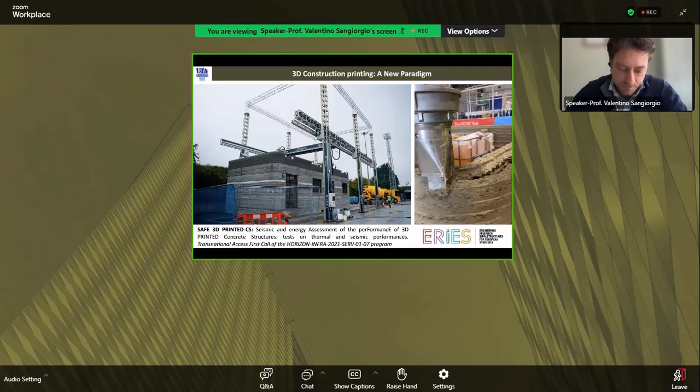To the left, you can see a short video of the technology. So this is the COBOD machine. This is interesting because you can print also concrete with aggregates of 2 centimeters of diameter. So this is quite a large aggregate if compared with other technologies.

In addition, we investigated the construction techniques that are being used in the real sector. For example, here you can see a prototype of a construction built with this technology from HTL Tech, a partner of our project. Typically, these constructions are built with 2 walls that constitute the envelope, and inside the wall, the companies are including also insulation material. There are also some important structural details that I will show in the next slide.

From this, one important thing is this change of color. So please remember this kind of situation because it's very important for the structural performance. This happens when you stop printing one day and you start printing the day after. So this is a cold joint that is difficult to avoid because otherwise you should have workers that work full time.

In addition, this kind of joint can happen also for a momentary issue of the 3D printer. Sometimes it happens. And so we cannot forecast the position of this cold joint all the time, because if the machine has a small problem or if the concrete has a problem in the pumping system, we need to stop the printer and this creates a cold joint.

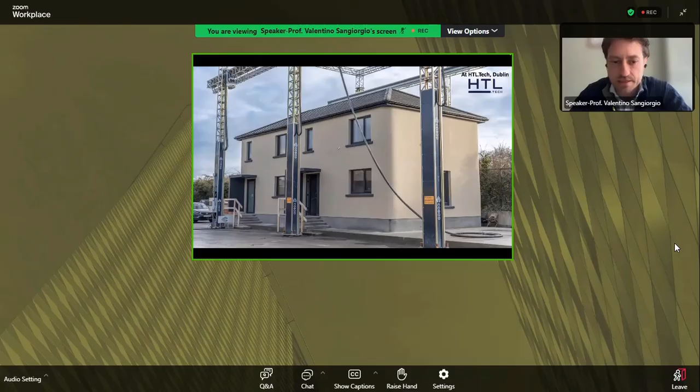Okay, so this is the view of the building after the finishes. And this is a construction typology that is already being used in the north of Dublin, because HTL Tech is a company that works in this area. So this construction technology is changing the paradigm of construction, because this new typology is not similar to steel, is not masonry construction, and is not similar to the classical reinforced concrete frame structure.

This is something new. Indeed, we have orthotropic material that is related to the process of creating walls layer by layer. We have new construction details. For example, here you can see a lintel that is used to create openings. We also have different reinforcement. You can see here that we put this kind of light reinforcement to avoid the collapse of the wall during printing.

And this can be also helpful to make the two walls collaborative in the entire envelope.

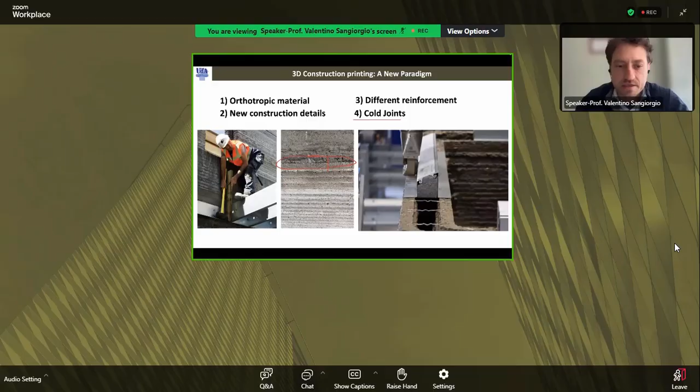And finally, we have the cold joint. So you can see here what happened when you stop the printer and you start again after a few hours or the day after. Typically in the construction practice, companies use some bonding primer to increase the connection of this cold joint, but I can say that it is not sufficient to have the same characteristics as the rest of the construction.

So we decided to investigate this problem in a 4-step procedure. First of all, preliminary tests to analyze the orthotropic nature of the material. We used the preliminary tests to calibrate a numerical model, and after we designed the final test by considering the foundation level, the connection with the shaking table, and also the dimension of the specimen. And finally, we had the final full shake table test.

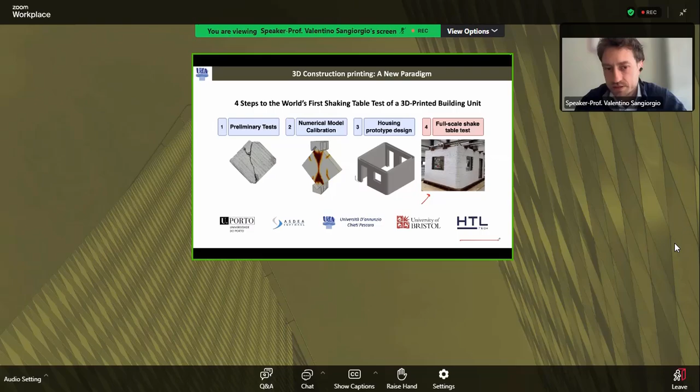This project is made in collaboration with the University of Porto, ASDEA Software, my university, University d'Annunzio of Chieti Pescara, University of Bristol that hosted the final shaking table test, and HTL Tech, that is the company that provided us the COBOD technology. So first of all, first step is the characterization of the material.

So the next step was the calibration of the numerical model. We developed two different typologies of numerical modeling. One by considering a layered model, so we model every single layer with the interface, and another version of the numerical simulation with a homogenized material. So in this case, the orthotropic nature is included in the information that we use to build the numerical model. The numerical model is made with STKO, that is a software that is developed by ASDEA.

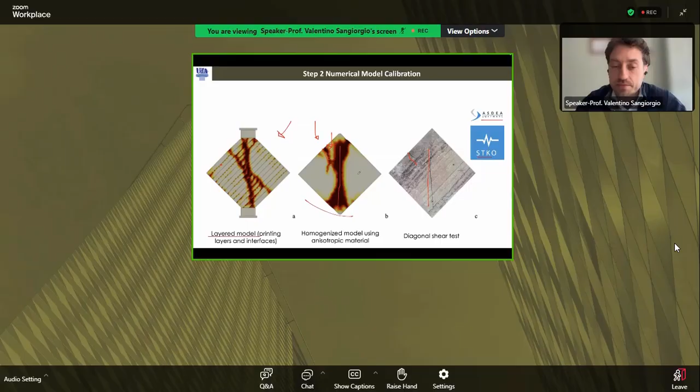The result was very similar, and so we decided to use the homogenized model because this is quick to be achieved, and also the computational cost is lower than the layered model. The result is almost the same. And you can see here that the cracks that occur in the diagonal shear test can be simulated very well in the numerical simulation.

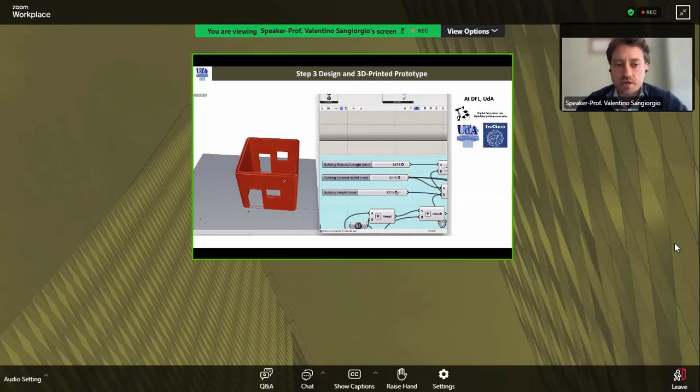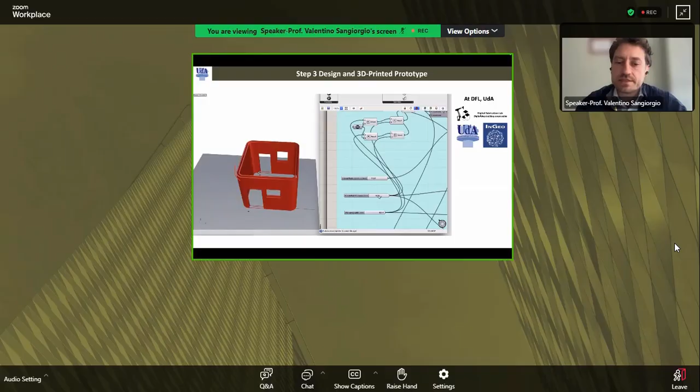The third step was the design of the printed unit to be tested on the shake table. So we developed a parametric model, and you can see that with this parametric model we can change a lot of geometrical configurations of our construction. In particular, also the position, the dimension of the opening, the radius of the corner, all the parameters that can be important for the structural performance.

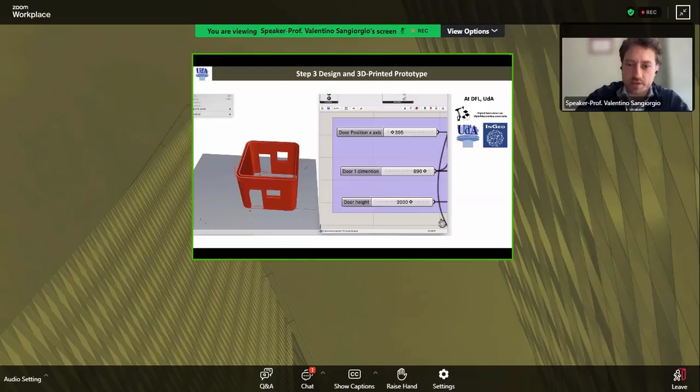This was very important to achieve the final configuration of the test, because with this script we were able to generate, in a very fast way, a 3D model to be analyzed in the FEM software. So after an iterative process of exporting the geometry, adjusting parameters, and simulation, we reached this final configuration.

Since our goal was to investigate the seismic performance of the structure and not the connection with the soil, we decided to connect perfectly the construction with a steel ring beam that has been directly connected with the shake table. In this way, we started printing directly in the laboratory. So here we are in the SoFSI Lab, the structural laboratory of Bristol.

And you can see that we used exactly the same construction techniques that are used in the real world. You can see also here other reinforcement that can be used typically in the construction site to reinforce the opening.

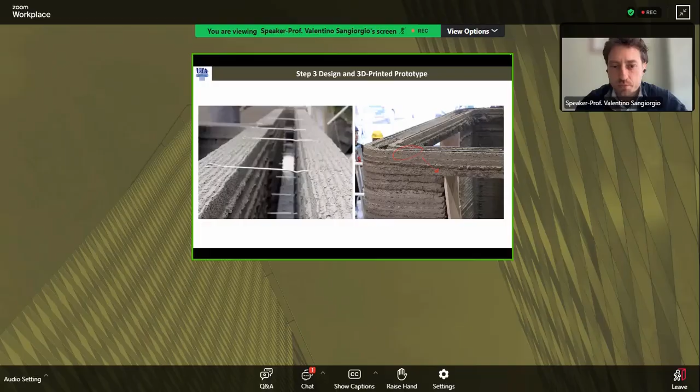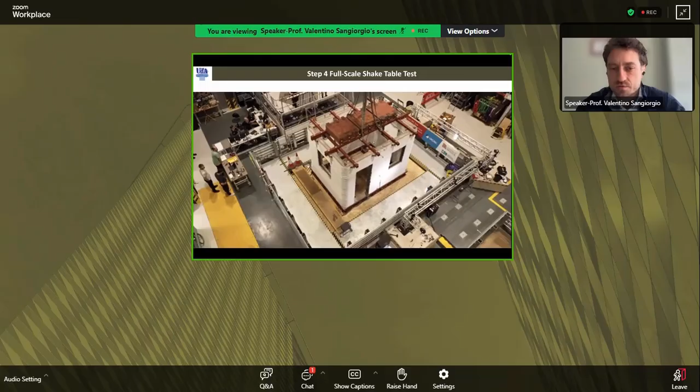So after this, we used a lot of sensors, cameras, accelerometers, but also sensors to identify the deformation of a lot of different components of the construction. So you can see here a lot of sensors located around the structure, and we started the test.

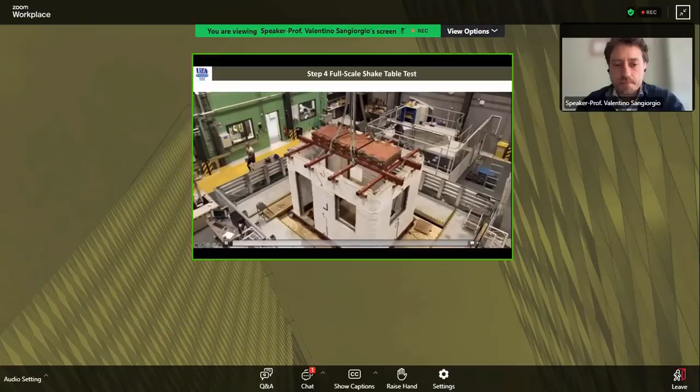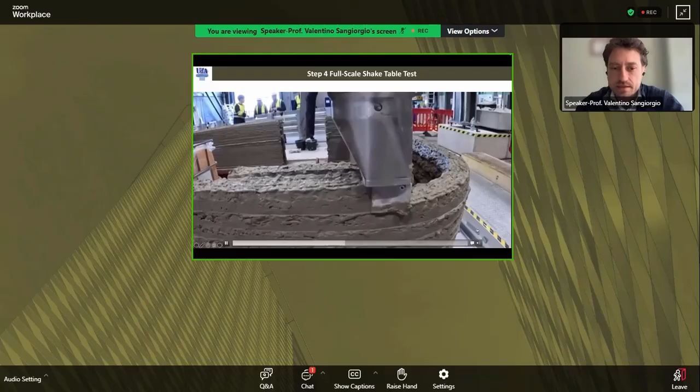If we wait a few seconds and we go to the end of the video, you can see exactly the moment where a huge failure occurred. In particular, we can jump to the end. If you look here, you can see that all the upper part has been detached from the rest of the structure.

Here you can see a huge crack, and another crack occurred in this position. So here you can see what happened during the test. This is the upper crack, and here you can see a lower crack, one horizontal and some diagonal cracks that reached the opening. Why is this interesting?

Because the cracks occurred exactly in the position of the cold joint. So we can state that after this test, we demonstrated for the first time the importance of the cold joint compared with the opening.

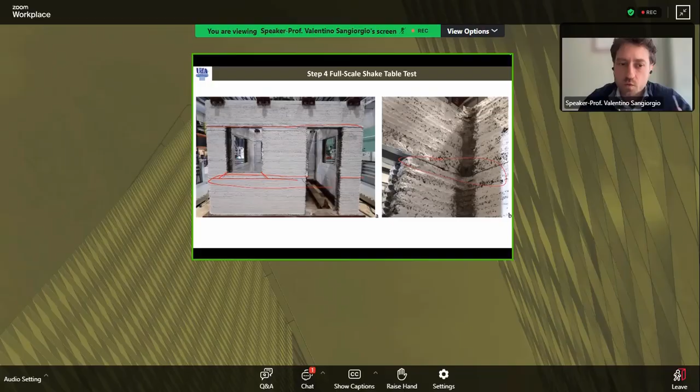In future research, we will complete the analysis of all the numerical results of the tests that were concluded a few months ago, and so we will be able to disseminate in the scientific community all the numerical results of the modeling, the calibration of the model, and all the numerical results of this kind of test. Okay.

I also want to introduce another project that is not properly 3D printing, but is strictly related to robotics and this kind of tool in the construction sector. This project is named Masonry Surgeon Bot, a FISA project funded by the Italian Ministry of Research in collaboration with a local company. This is interesting because we are building a robot that is able to operate like a surgeon on the masonry to reinforce existing construction.

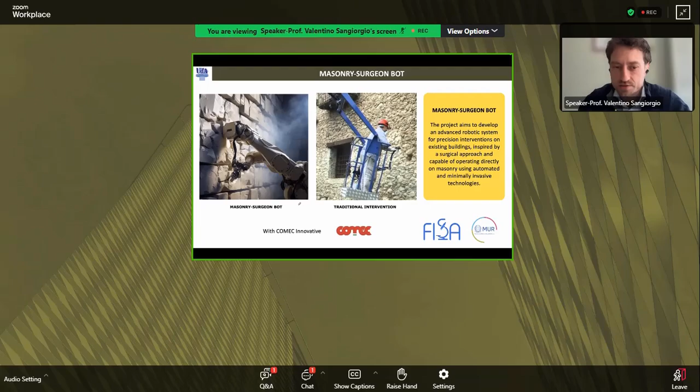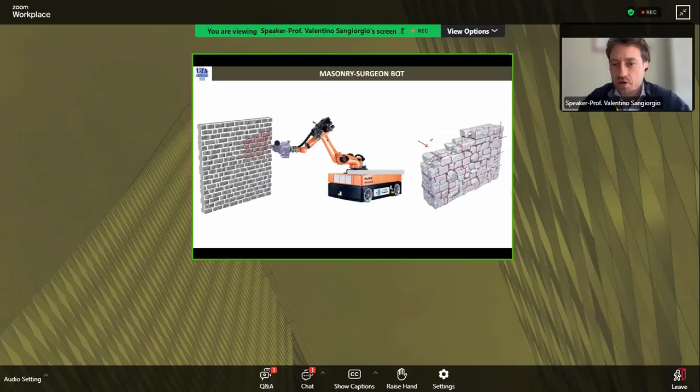So we will develop a fiber reinforcement system that will be extruded or included directly inside the mortar joint to reproduce a modern version of the reticolatus intervention. So here you can see the robot of the company and the complexity of the end effector that places the fibers. And in our project, we are starting to develop all the automation systems for the robot.

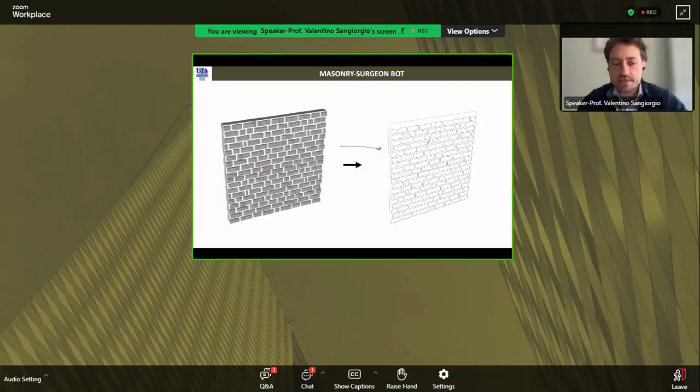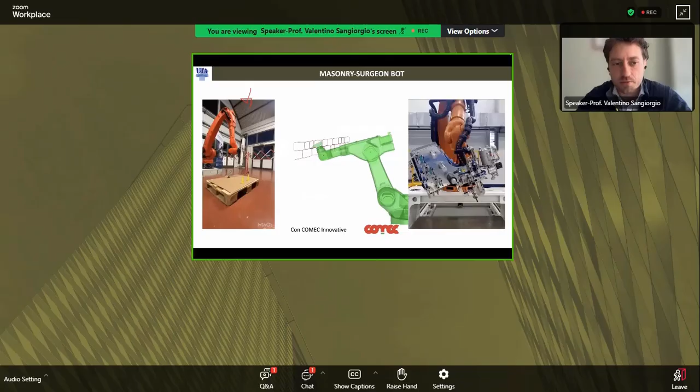So the robot will be able to 3D scan the masonry, identify the mortar joint, and operate directly inside the mortar joint. This is just a simulation, but you can see in our laboratory that we are starting to work with the robot to try to make the robot safe during the operation. So you can see some obstacles here, and you can see the robot avoiding the obstacles during the toolpath.

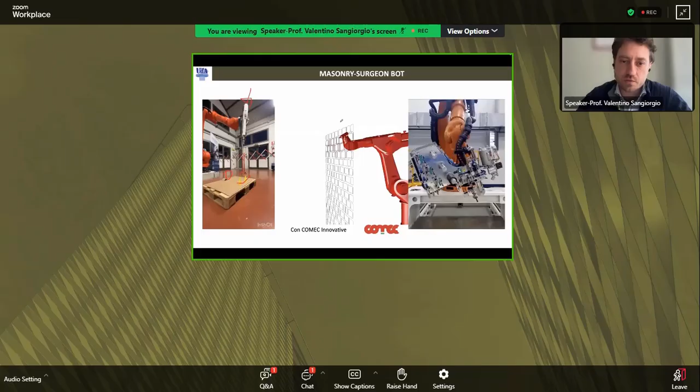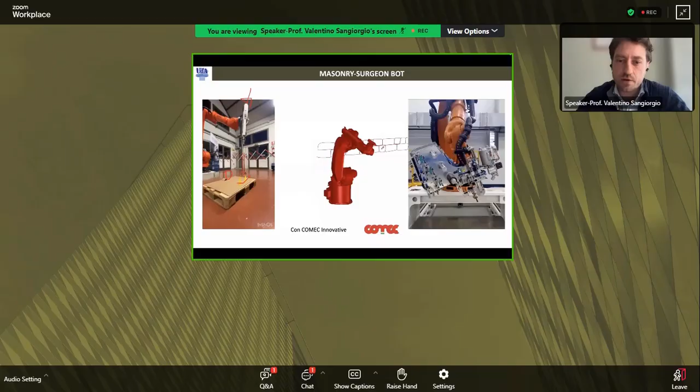And here you can see the toolpath that is fully generated with artificial intelligence in combination with a Python script and Grasshopper. So the combination of these three tools allowed us to automatically achieve the toolpath of the extrusion. And here you can see the complexity of the extruder that is being adapted for this kind of application, because the company typically works in the automotive sector or in the aerospace sector.

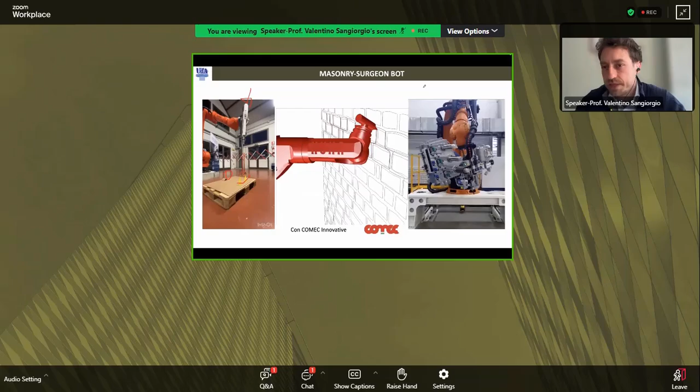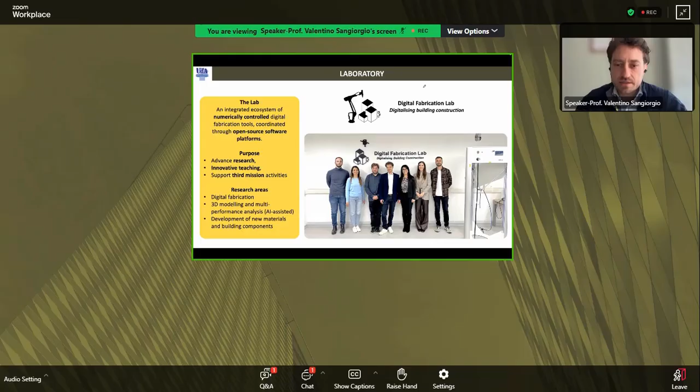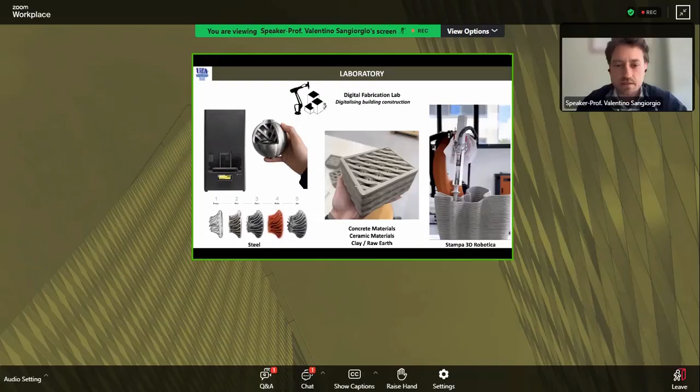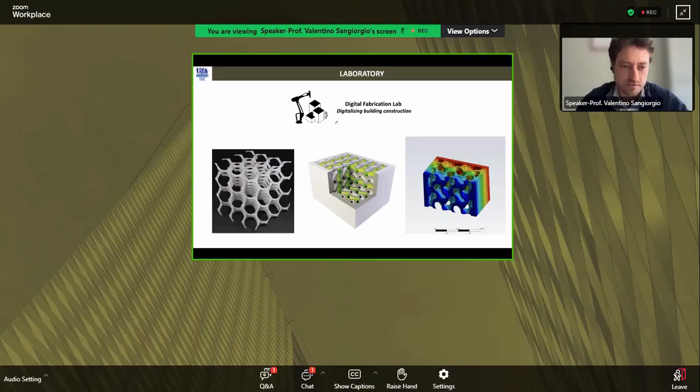Okay, I jump to the conclusion. I wish to thank all the guys of my laboratory, the Digital Fabrication Lab. Without them, it would be impossible to achieve these projects. In our laboratory, we have different machines to print steel, concrete, but also clay, raw earth, or ceramic material. And you can see here how we can reach complex geometry by the combination of artificial intelligence and parametric modeling.

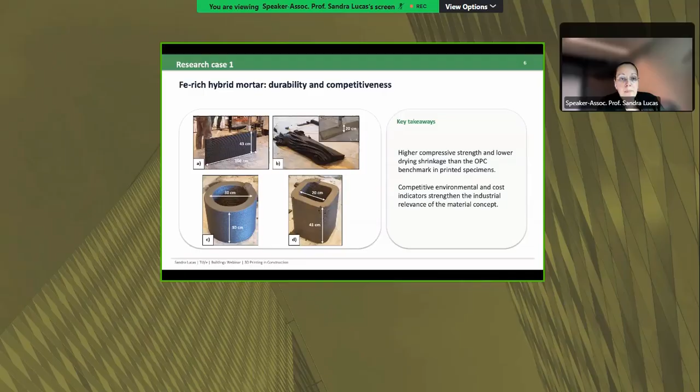As I said, we developed an alkali-activated material for our 3D printer. You can see here the process, but I won't go into much detail. We were able to print at a relatively large, medium scale, and had good results with this material, but then we faced the obstacles of reproducibility.

We also did a lot of work, and now have a PhD student finishing her work on waste-derived lightweight aggregates - we used cork for this specific purpose to develop a lightweight material. Again, we were able to print at medium scale. In the final steps of the project, we printed a wall with this cork material, and reached very interesting results in terms of thermal performance and mechanical performance.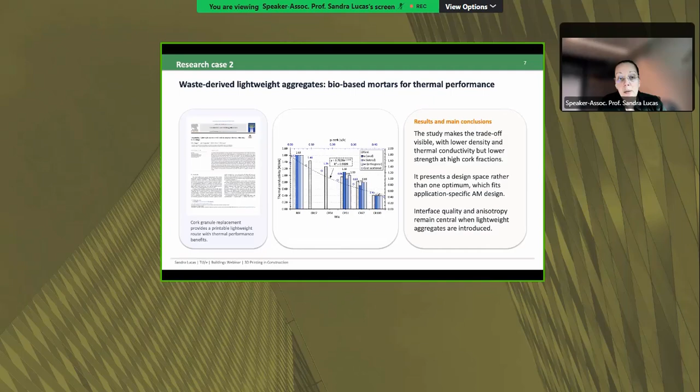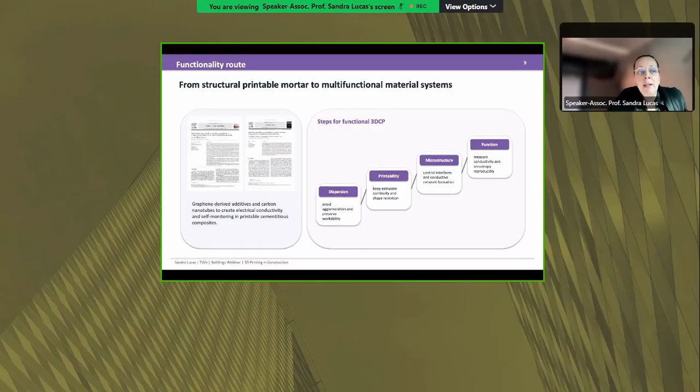We moved then from looking into structural printable mortars or lightweight mortars and sustainability to the side of creating materials with functionalities. This is another side of our work here, where we try to create a self-sensing material. The goal was to print a material that not only can fulfill the structural requirements, but that can also detect damage, or that we can develop a way to sense that damage and act if we detect it.

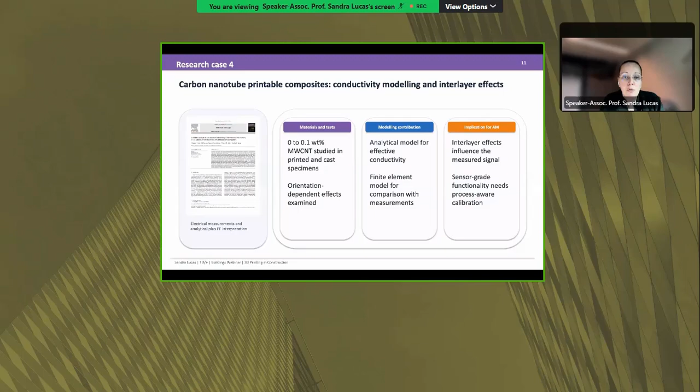So we printed specimens again, but this time in a much smaller scale. We explored the use of graphene nanoplatelets, but then we moved to carbon nanotubes. For this work, we managed to develop and study the conductivity at a small scale. But we also faced, again, some problems, especially when moving to the large scale.

So in this design, among the different design strategies that we selected, there are still some variables that we can't fully monitor. For example, when you go for alkali activated materials, there's still the open time that needs to be controlled, the pump pressure, and aspects with the activator sensitivity, which is still a main risk.

For the fillers and aggregates, you still have the segregation aspects to control, the anisotropy, the packing changes, because you have a material that isn't always packed in the same way. So you have changes in porosity and extrusion stability. And with the multifunctional or functional materials, which we call 4D printing, you still have a lot of problems with mixing control, poor dispersion of these materials, and the cost.

So then we moved to what I call 5D printing, trying to embed the functionality but also the control - so the function plus the control in the system. And we took the step to improve how we control our printing process.

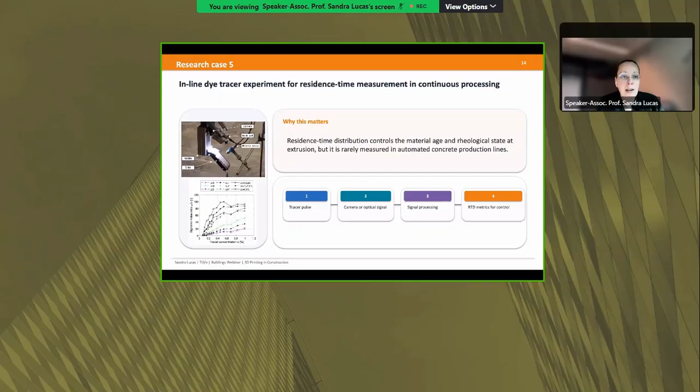So we started by developing these inline controls, and from that work, we took some steps further to study and control other parts of the system. We are trying to create a system where we can, for example, read the pressure and act on the material if we need to change the amount of superplasticizer, or the amount of aggregates, or the amount of water.

And from that process control, we realized that we're collecting a lot of data from these materials. So we moved to explore how we can use machine learning models and AI to control the materials. We have some results already from early work done by students in my group. But we realized that, for example, in order to predict printability - one of the aspects we started exploring - we could use these models and AI to predict the printability of our material. So the moment we go to the printing system with a certain composition, we should already be able to know that the composition is printable or not.

This connects with the fact that we're trying to use alternative binders for more sustainable mixes, but at the same time, if we reduce the amount of cement, we have problems controlling these materials, and we need to predict if that composition with those specific materials will be printable. In a preliminary study, we realized that indeed the composition of the materials has a huge impact on how the system and the models will predict printability - whether they will say the mix is printable or not.

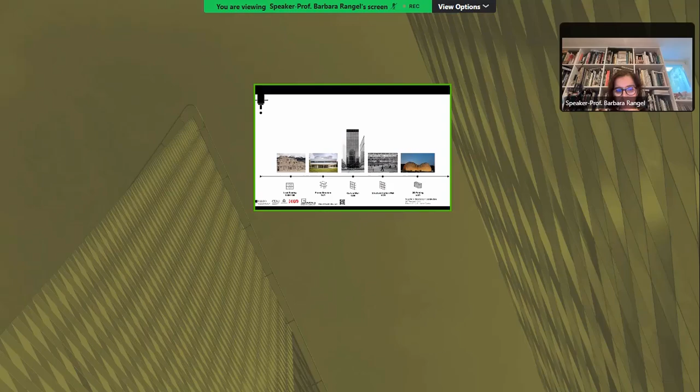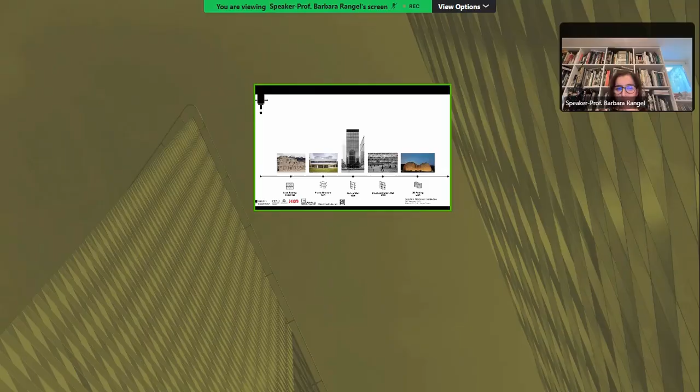If we take a fast look at the history of construction, architecture, and civil engineering, we can understand that the way we build is directly related to the form of architecture. So the question we ask now is: how does 3D printing transform or is transforming the way we make architecture? If we look at Corbusier's experiences in La Unité d'Habitation de Marseille, when concrete was beginning to be used, complex forms started to be done. Or even in Frank Lloyd Wright's experience in Fallingwater, the possibility of having spans was used in a very intelligent and robust way to define the architecture of the house.

And of course, Sagrada Familia is an experience of disruptive construction and architecture. I can imagine if Gaudi was born in our era and had a 3D printer, he would have gone even further with his formal experiences. And Miguel Fisac, an architect and engineer from Spain, in his work was always making this relation, this biomimicry relation between the human body and engineering.

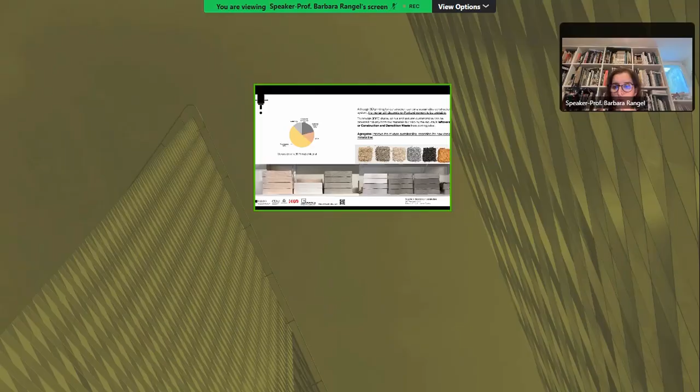In his research during the last years, he made a library of materials that can be added to the mixture to reduce not only the cement, but also to replace part of the natural aggregates, giving the possibility of new tectonic forms, not only in texture but also in color, using waste materials like brick from demolitions, glass, and some stone powders like granite or marble. This is related to the parametric library he developed, so that anyone who uses his research can make a direct connection to the development of the piece, with the characteristics not only of the material but also of the equipment.

Elis Ribeiro, also working with us in her PhD at DG at FEUP, used marble powder to develop some Cobogó structures. This is a structure that is used in Latin American countries to provide natural ventilation of the spaces. And now she's also developing a wider structure like this, but using fibers in the mixture.

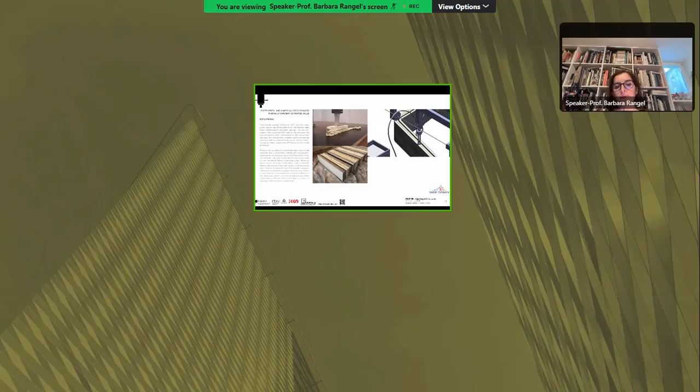We also were able to produce some research on using soil as the main component of the mixture in the work of Ana Luisa Guimarães, a Master's student in Design that we also have in the Faculty of Engineering. The work of Sofia Pessoa, directed by Ana Sofia and Sandra Lucas: she has been working, and continues now after her PhD is finished, on the study of the thermal behavior of the 3D printing system. She is making the connection between the thermal behavior of the wall and its parametric geometry.

And Jaime Cunha made an LCA study of a house printed by a company that we have been working with that is here in Porto. And also Manel Jesus, who will present later, is studying the use of 3D printing in the refurbishment of monumental buildings. And also here, a work made by ILS, directed by Jorge Lino, that is working on 3D printing in reefs.

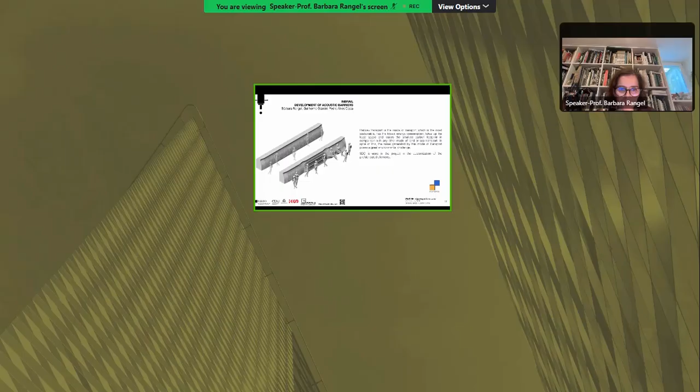This is another work that we have been developing in a scientific project, but also in the PhD project of Juan, where we are developing a building system with soil, and also some experiences that we made with our students in the Master of Integrated Project Design in Construction, where we work directly with the companies, and we ask the students to think of an evolutive house that could be printed within a table of 12 by 12 meters. That's the capacity of the printer that the company has.

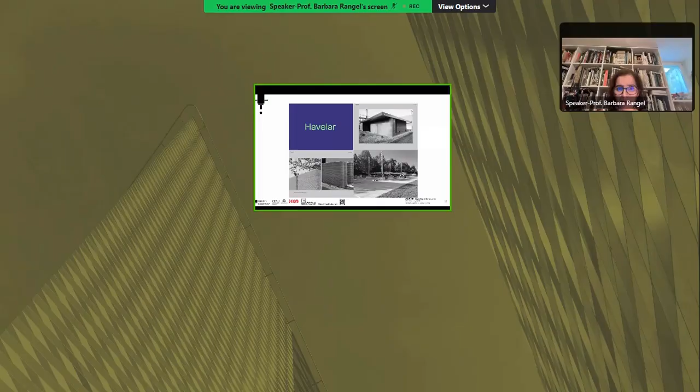With all these experiences, we were invited by this company, Havelar, to provide scientific support for their work. And we entered a competition with them in Matosinhos, a city next to Porto, to make a project for a municipal building where there is a lab of circularity, and the community can go there to upgrade their supplies and learn a bit about circularity in their community.

We had the luck to win that competition, and that was real hands-on work where we could put into practice what we were working on, the industrialization of construction from A to Z, meaning we were able to use 3D printing construction on site by printing the main walls, but we also made a prefabrication study where all the elements that were not printed were made off-site, and we studied how we would arrange and articulate these two ways of building to reduce the time of construction and also the amount of waste produced in the construction.

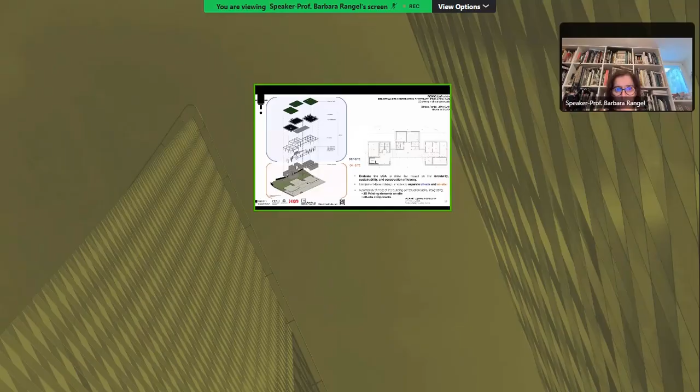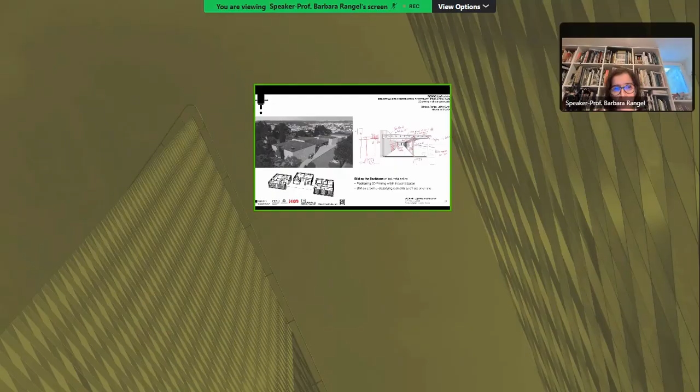So the on-site work was mainly the work made in the terrain, and also the printed walls, and all the rest, like the structure inside, the windows and roofs, and of course all the other sets of doors and bathrooms and stuff were all made off-site. It was very interesting the way that we worked, because as we were thinking in an industrialized mindset, we had to do very detailed thinking on all the elements that were going to the site, because there was no time for changes, and it would be difficult to correct errors.

So this was, as I said, a way of thinking in an industrial mindset that we are not very used to in construction processes, because I don't know about other countries, but in Portugal, the construction sector is still very, very conservative, I could say, and the coordination and management of work is still, I would say, difficult to gather and articulate timings and tasks in a proper and very optimized way.

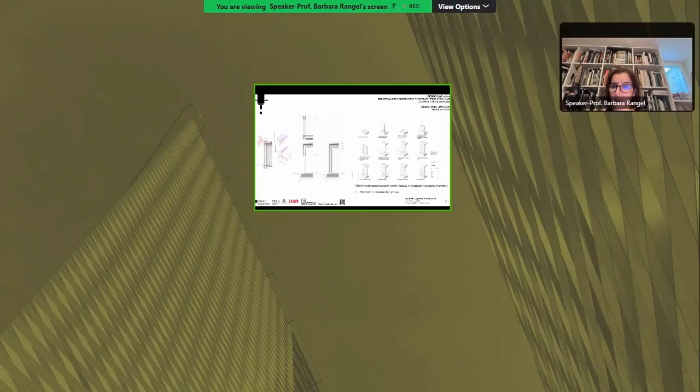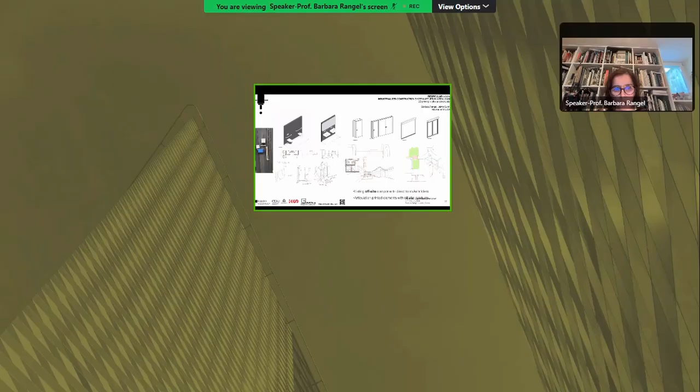So we had all this preoccupation with having all details very studied and all the timings very studied because of the time of the printing, for example. So all the elements that were not printed, as I was saying before, were made outside the building site. For example, the bathrooms were made in these infrastructured walls and all prepared in the factory before they went to the building site, so that when they arrived, we just had to do a plug and play construction to make it fast.

So this kind of process posed a lot of challenges for us, particularly in the timings of articulating the different elements, for instance, the windows and the walls. So we had to do some experiments in the factory to articulate, in this case, for example, how we could put the base of a window without stopping the printing process, like in the latest presentations that were made here by Vittorio.

We know that we have a cold joint when we stop the printing, so we were worried about those issues. So we had this preoccupation of how we could manage the construction and at the same time have the possibility of not stopping the printing to put all these elements.

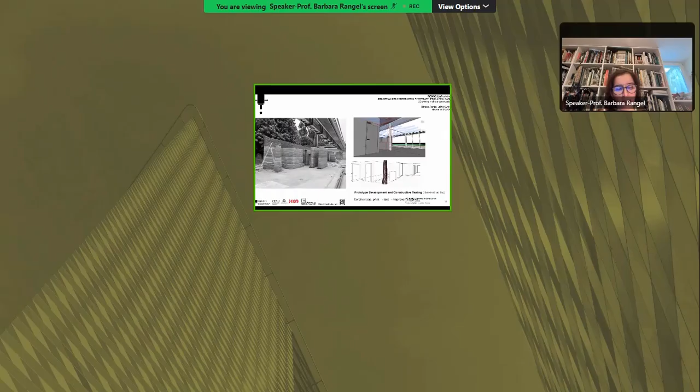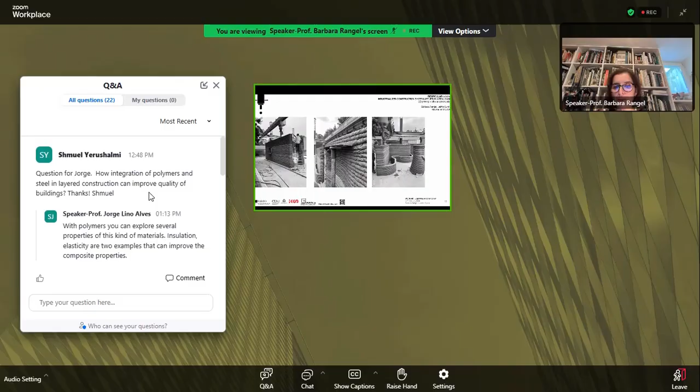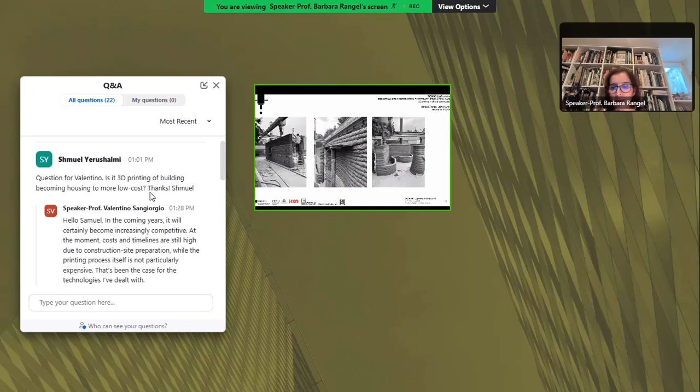So a set of tests were made in a factory of the main walls, of the doors, of the structures that we wanted to do, for example, to disguise this steel column that we have in the middle of the building. So we tested it before we went to the building site, making these small prototypes. For instance, the texture of the wall, the way that we could use the printing to make different forms, to introduce the lighting, for example, or to understand what would happen in those cold joints after printing in 2 days.

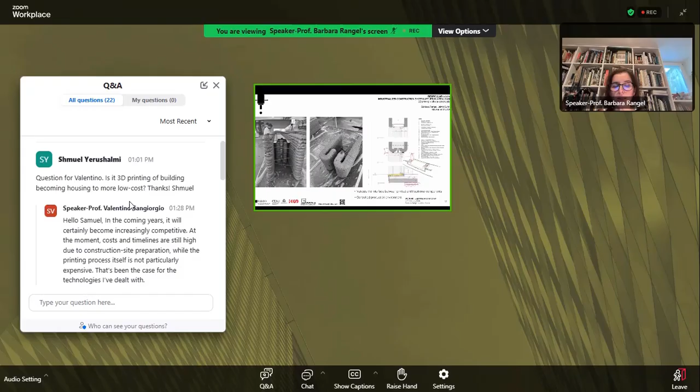Here are some tests that we made concerning the introduction of the windows. That's a big problem in 3D printing construction, because we are putting together two systems with really different tolerances. We have a tolerance in 3D printing of centimeters, and then we have a window made of steel and glass with a tolerance of millimeters.

And the connection of these two processes and building elements can be a real problem afterwards in the performance of the building concerning water entrance or even humidity and thermal joints. So this has been a real problem for us. So the construction of these prototypes was essential to think and to provide solutions to the construction itself.

Also, during this first phase, we thought of structures that could help us not only to be aware of the thermal bridges and break the thermal bridges, but also to facilitate afterwards the setting of the window systems that were once again made in the factory and then put on the building site. So we developed these kinds of beams that were already prepared to receive the window structure, having this void in the middle to make possible the break of the thermal bridge.

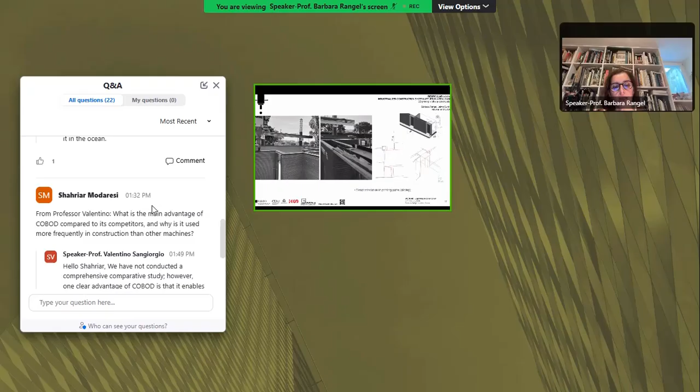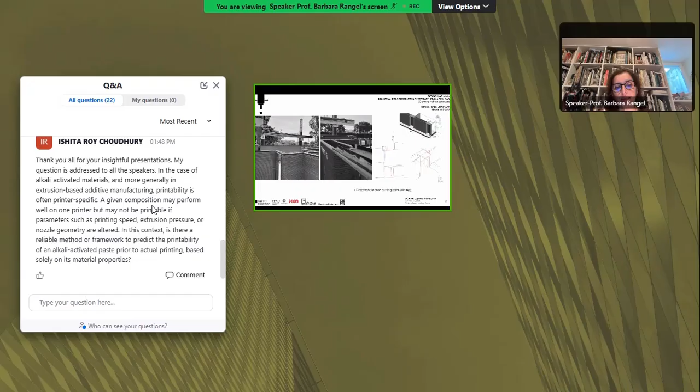And at the same time, we tried to have only this one cold joint, making the stop of the printing system to put all these supports for the doors and windows. So this came as a design principle to be added in the method that we are developing, because it would be important in terms of construction to make just one stop during the printing to avoid those cold joints that Valentino was talking about. So we tried to design all the building with this same height.

Also, in the design of the wall, another concern was the size of the wall. These walls are 12 meters long. So talking with the structural engineers that helped us develop this building, we thought it would be important to have a curved form in these main walls, also because of the stability of the wall. So that's another lesson that we got from the construction, the possibility of having a real building to have this experience.

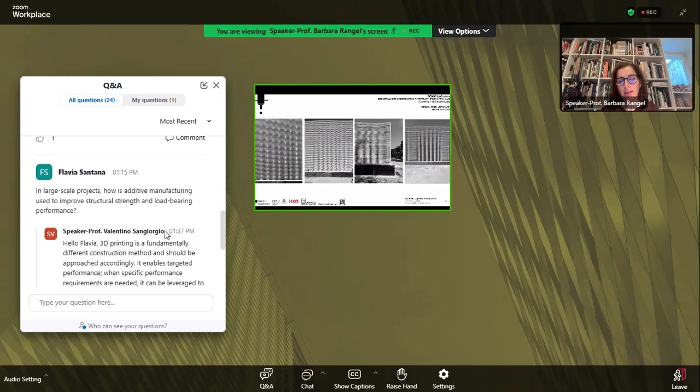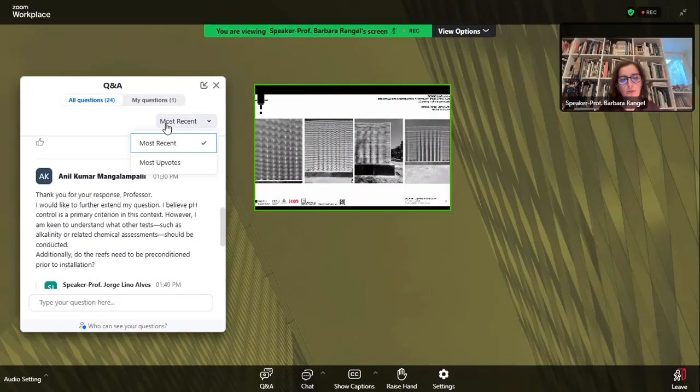So when we talk about the freedom of 3D printing, it's very limited. If I can say, it is an opposition of concepts. But in the end, this limitation added a texture that we were not thinking of in the beginning. I think it gave personality to the building itself, taking as part of the design these problems, turning problems into a solution, and an aesthetic solution for the building.

These are some images of the building almost ready, and here it's very obvious what I was just saying, where we can see the flat parts are related with the column behind, and then the curved parts where we have a void. The building is divided into 3 blocks because of the size of the printer. Each block is 12 by 11 meters, and in between them we have a metal structure that makes the foyer of the building.

In here we see the curve that I was referring to, and the paint that we put on the cold joints to try to avoid cracks between the layers.

It was also interesting to do this work because, as we know, in Europe we don't have the regulations to use 3D printing as structure. We are obliged to have a structure inside the wall. And in this project, we decided to use metal structures so that we could make them off-site and easily put them inside the wall. We were very worried, again, about the tolerance, because we don't have access to the inside of the wall to make sure that the column goes down perfectly without any interruption.

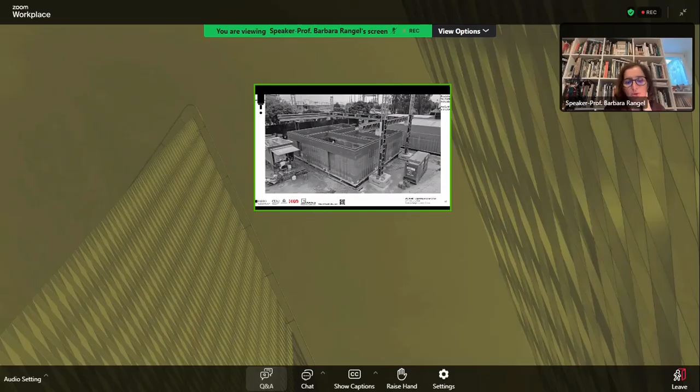I think this is also a video. Here is the printing of the last building. It was also a lesson, because in the only 2 days that were raining in July, we were printing. So it was interesting to have the warmest days of July and also the most rainy days of July in the printing. So that was also a lesson. Sorry. And here the team, very happy when they finished printing the first building.

This was also a challenge because while we were printing, we had to wet the material, and during the printing, our team, in this case Jaime Cunha and Sofia, went to the building site, so we were always there making sure that we could collect information and data to study these issues in our next projects.

And they put a sensor inside the wall, and we are now collecting data for these first years, so we can understand, with the eyes of building physics, the performance of this building during these seasons, so that we can start thinking of making a digital twin and make predictions of this system. How can we improve it, and how is it going to perform in other projects that we want to do?

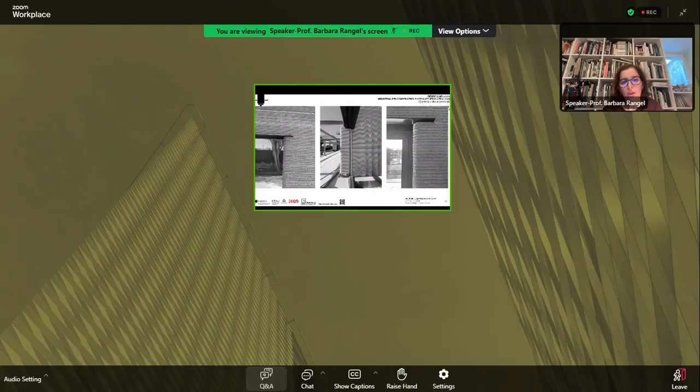Some images of the building after the printing, starting to put in all the other systems like the air conditioning, the electrical supplies, and also the interior doors that were made in the factory, and we tried to make these boxes easy to put in the walls. And here are some images of the infrastructured walls that I've told you about, that were made in the factory and put inside the bathrooms so that it would be an easy plug and play system.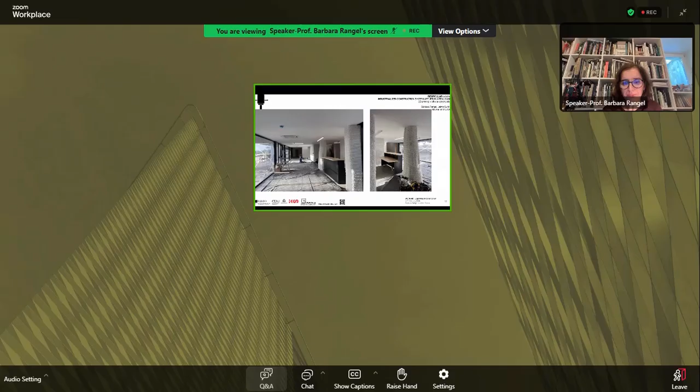Here are some finishings almost ready, and the exterior finishings, where we tried to use materials so that the water could easily go to the ground. Here, sorry, there was a video missing, but here's some of the outside of the building. We used a system and finishings that permitted the rainwater to go directly to the ground instead of having a blocked water system,

and make the water collection also circular and part of the whole concept of the building, making the CO2 emissions lower. And now we are making the LCA of the whole construction set, just to understand if what we predicted was accomplished and what can be optimized in the following works that the company and we could make. And that's all. Thank you.

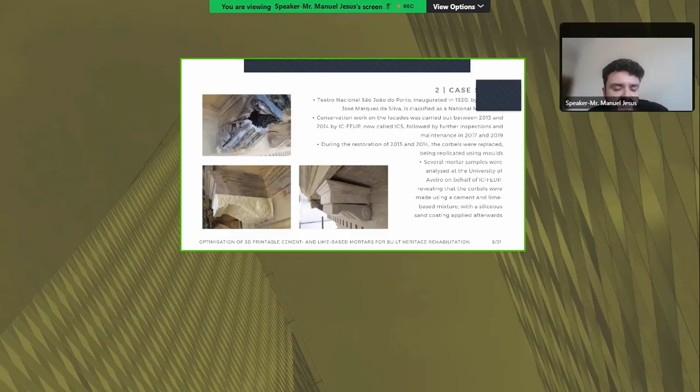The experimental plan began with computational modeling of the test specimen in Grasshopper, where we designed the 3D model, choosing the layer dimensions, printing speed, and extrusion factors, and later the G-code was created. The second step focused on mortar preparation, involving characterization of the constituents and determination of dosages, mixing times, and speed. Environmental conditions like air temperature and relative humidity were strictly controlled. Once mixed, we performed fresh state characterization through flow table tests to pre-evaluate fluidity, while slump tests assessed the material's initial buildability.

If the mixture presented adequate consistency, we proceeded to printing trials to evaluate other printing parameters discussed in other presentations, like extrudability, buildability, and flowability. Finally, standardized hardened state tests included flexural strength, compressive strength, and capillary water absorption to evaluate the durability of the mortars we developed.

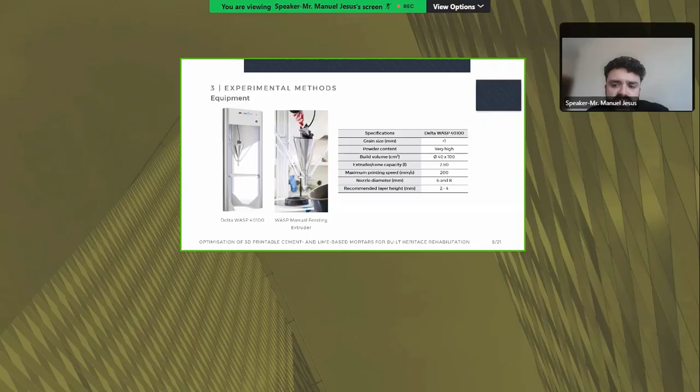Regarding the equipment available in our laboratory, we began the experimental campaign by defining the operational parameters. A Delta WASP 40100 was used, which imposes specific material constraints. Since the nozzle diameters are quite small, 6 and 8 millimeters, the maximum aggregate size is limited to 1 millimeter, requiring a higher concentration of fines in the mix design to prevent clogging of the extruder. The printing volume is limited to a 40 centimeter diameter and 1 meter tall element. The printing speed is kept at 200 millimeters per second, and based on the nozzle sizes, the layer height must be between 2 and 4 millimeters to ensure optimal deposition and interlayer adhesion.

Regarding the 3D model design, the printing path was programmed in Grasshopper and translated into G-code using the Termite plugin, which is optimized for Delta WASP printers. The test geometry was designed to evaluate material behavior across different levels of geometric complexity, as you can see in the figure on the right. The samples were printed to a height of 50 millimeters, consisting of 20 layers.

While the standard layer height was 2.5 millimeters, the initial layer was adjusted to 3 millimeters to mitigate the material spread and ensure a stable base for the subsequent layers.

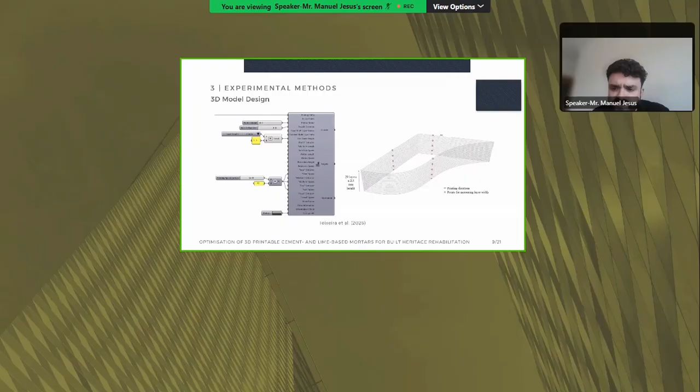Regarding the mix design, initially we defined two primary mortar formulations based on different binder to aggregate ratios. The first one had 70% of binders and 30% of aggregates, and the second one had 60% of binders and 40% of aggregates. For each ratio, we tested 3 different binder combinations, resulting in 6 base formulations without superplasticizers. From this first set of trials, the best compositions were selected for an optimization using superplasticizers.

As aggregate, fine sand with 1 millimeter diameter was used. And to ensure consistency throughout the experimental campaign, a fixed quantity of 1 kilogram of dry mixture was prepared for each trial.

Regarding the mix process and the fresh state tests, a strict mixing protocol was followed that began with the accurate weighing of all constituents. First, the dry materials were blended on a mixer at low speed to ensure a homogeneous distribution and to prevent segregation. We then gradually added water over a 90-second period while increasing the mixer speed over time. And to guarantee the full incorporation of all the components, we paused to scrape the mixing bucket and the paddle before a final 2.5-minute mix.

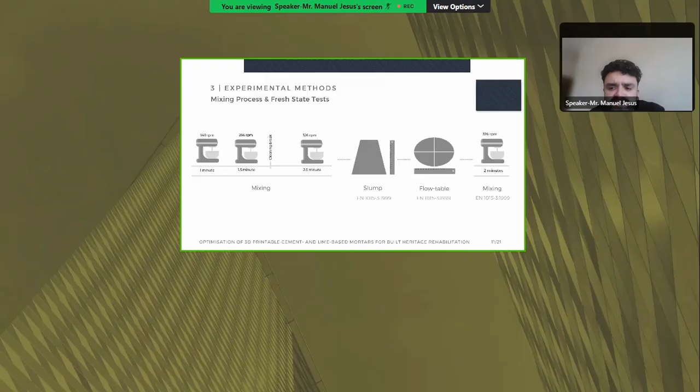At this stage, fresh state characterization was conducted, namely the slump and flow table tests according to the EN standard. And finally, the mortar received another quick remix to maintain its consistency before being loaded into the extruder cone and printed.

On the other hand, when the extrusion factor was set too high or the printing speed was too low, often combined with a high water to binder ratio, the layers suffered structural failure. This was identified as plastic collapse or elastic buckling, both of which served as indicators of poor buildability.

To avoid the structural failures previously discussed, the printing parameters had to be standardized and are presented on the table on the left. Using an 8 millimeter nozzle and a speed of 40 millimeters per second, each specimen was printed in about 5 minutes, and a layer height of 2.5 millimeters and a width of 10 to 15 millimeters was achieved, and these settings provided the stability needed to prevent plastic collapse or nozzle clogging observed during the initial calibration phase.

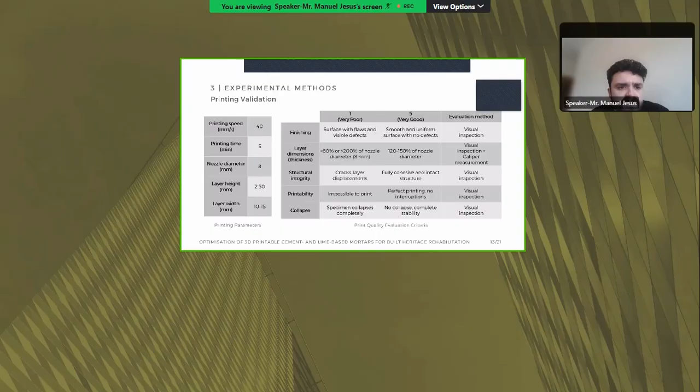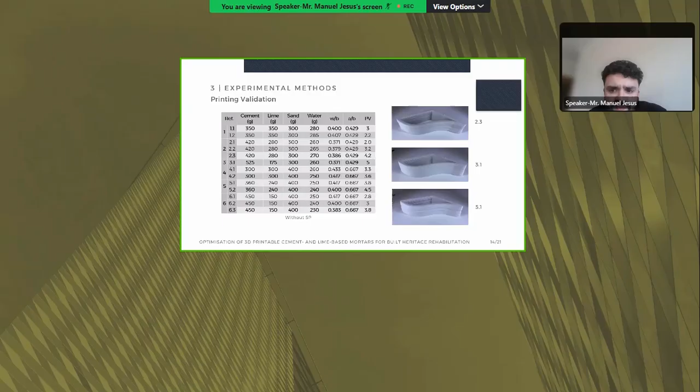The table on the left summarizes the experimental results and the dosage used for each mortar produced without superplasticizer. And to control the properties of the fresh mortar and to determine the necessary water content, we calculated the water to binder ratio and the aggregate to binder ratio. The water to binder ratio, as you can see here on the table, stayed between 0.35 and 0.40, which matches the literature that we found.

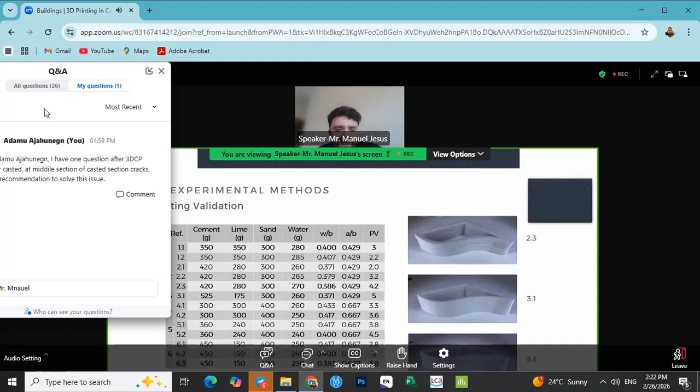This value is largely driven by the particle size of these materials. Finer particles like cement have a higher surface area and therefore require more water to stay workable for printing. On the right, we have some pictures of the best prototype that we printed.

The best performing formulations were selected for printing trials, this time with superplasticizer. Here, the primary objective was to enhance workability and flowability, but without increasing the water to binder ratio. Despite these optimization attempts, some formulations with higher lime content proved unsuitable and therefore were excluded. The resulting water to binder ratio for these mortars ranged between 0.29 and 0.34, and once again they were consistent with the established literature. The superplasticizer here was added at a dosage of 0.5% of binder mass.

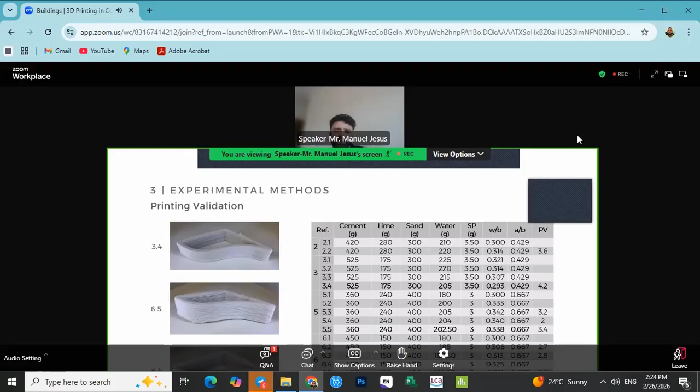And while this admixture allowed for a significant reduction in water content, these mixtures experienced a faster loss of workability, in this case, a reduced open time. This rapid stiffening presented a technical challenge because it increased the risk of extruder clogging, and some interruptions during the printing process were observed. Now I have some videos here to show all the printing trials.

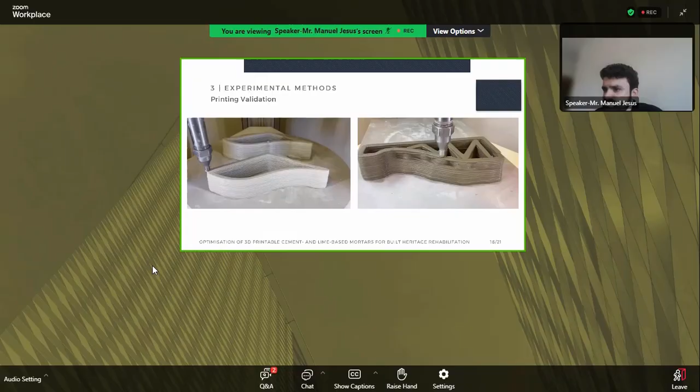On the left, the 3D model that we developed and I talked about. And here on the right, the application to the corbel of the theater. The corbel was scanned and then modeled also in Rhino and Grasshopper and converted into G-code.

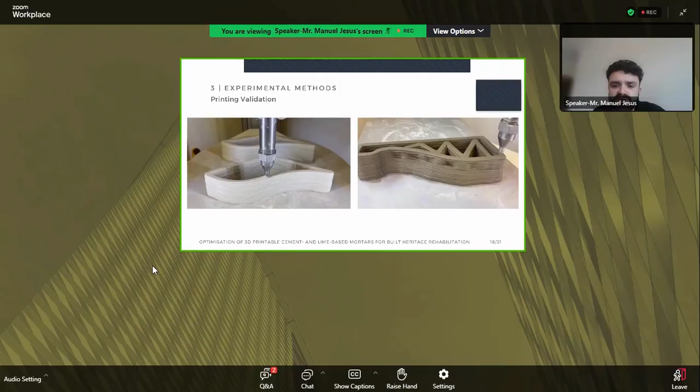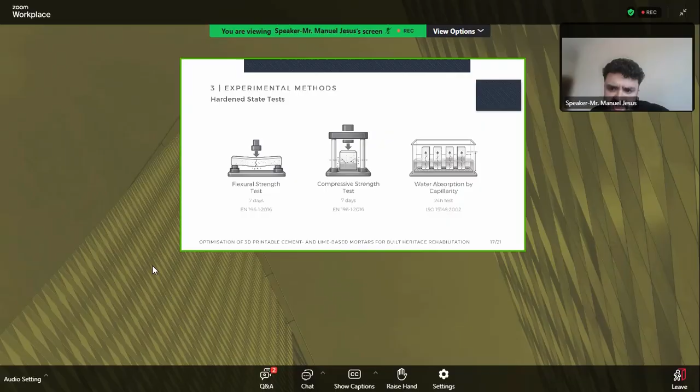So, compressive and flexural strength tests were conducted in accordance to EN standards also. And to evaluate the durability, as I said, the capillary water absorption coefficient was determined following an ISO standard, measuring the mass of water absorbed per unit area over time.

presented values between 10 millimeters and 20 millimeters, which fall also within the acceptable limit. So these values indicate satisfactory shape retention, a critical indicator for high buildability. And as you can see, formulation 3.1 and 4.2 recorded the lowest slump, demonstrating superior cohesion and structural resistance that is required for high-performance 3D printing.

Now, regarding the water absorption by capillarity. This test was conducted over a 24-hour period to evaluate the water infiltration on each composition. As established in the literature, the hydric performance of mortars is closely linked to their porosity, influenced by binder content, aggregate grading, and the water-to-binder ratio.

So among the mixtures without superplasticizers, formulation 3.1 demonstrated the lower water absorption coefficient, and this indicates a denser and less porous matrix attributed to its higher cement content that facilitates a more cohesive and compact structure.